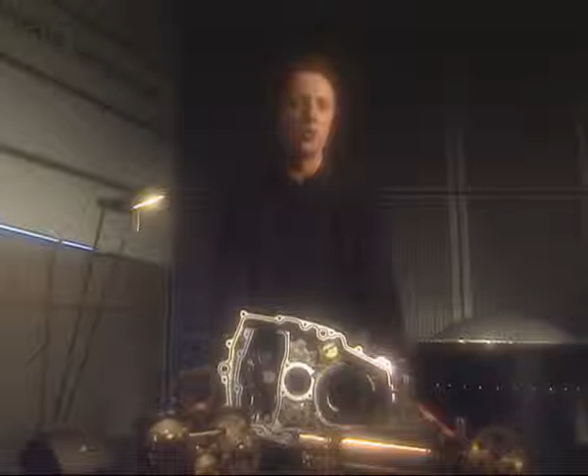Thus, the generator is able to provide a fixed frequency for the aircraft electrical network. Like blood in our body, oil is the key component of the IDG. It is used for cooling and lubrication, but it is also a hydraulic fluid used by the CSD to mechanically regulate the rotation speed of the generator. So you can see just how mechanically complex the IDG is.

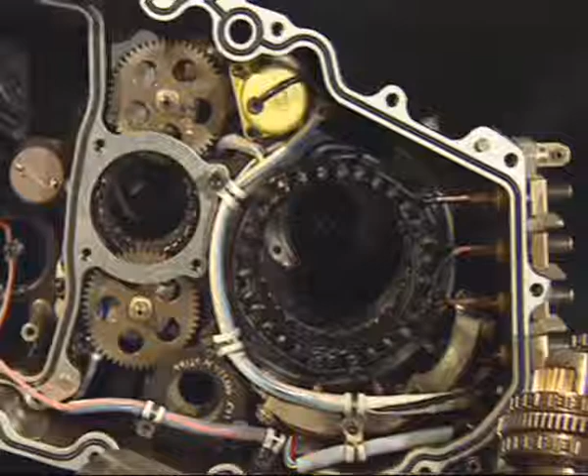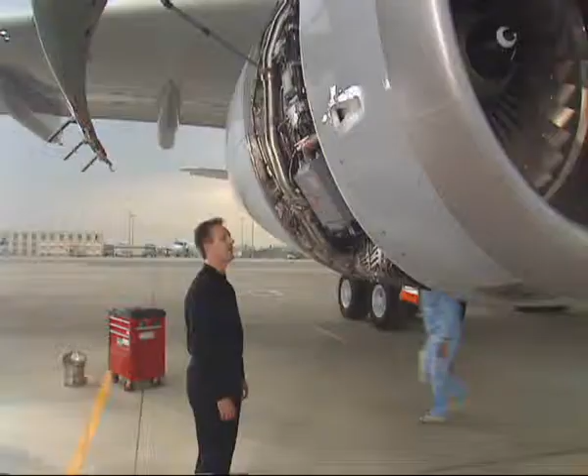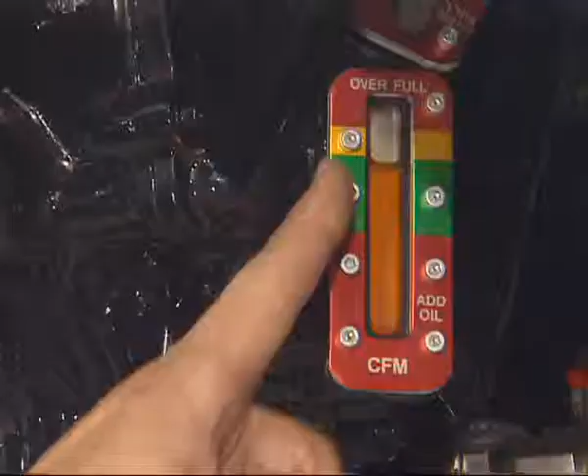The IDG is driven by the engine accessory gearbox. It is accessible in the engine nacelle. The reliability and the efficiency of the IDG depend on the cleanness and the correct quantity of oil used. The oil level is controlled via the sight glass. The cleanness of the oil is ensured by taking some precautions, which are described in the AMM procedure.

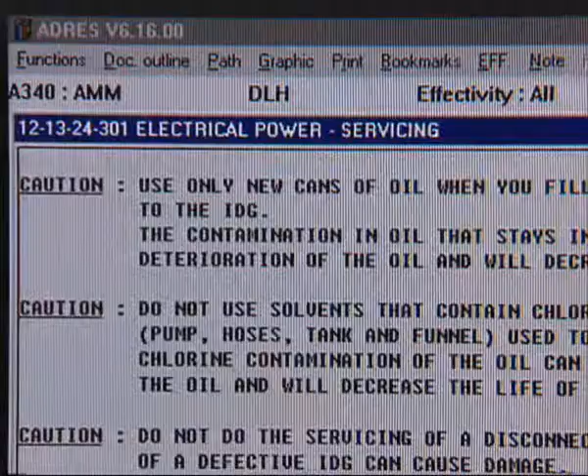The contamination of oil with water or dust can cause premature filter clogging, excessive wear of the IDG, and overheating conditions. Oil cans and tools should be kept in a clean and dry environment. It is preferable to use a new can of oil when you service the IDG.

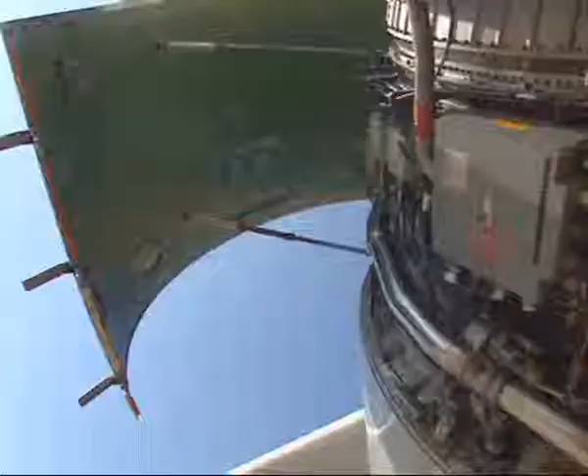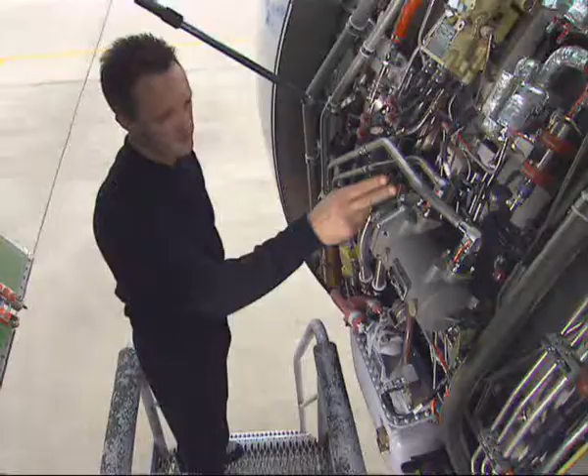The IDG oil system consists of the IDG itself, an external cooling circuit, and the IDG oil cooler. Let's take a look at how the oil circulates in the IDG oil system.

You recognize the IDG system: the IDG, the external cooling circuit, and the IDG oil cooler. During operation, the oil is pumped out of the IDG to be cooled down in the cooler. Then the cooled oil comes back into the IDG.

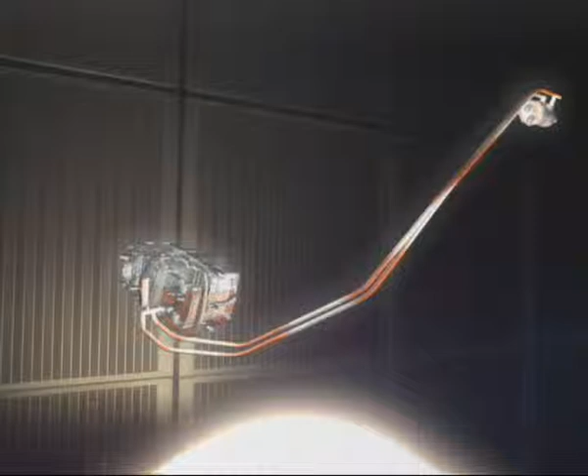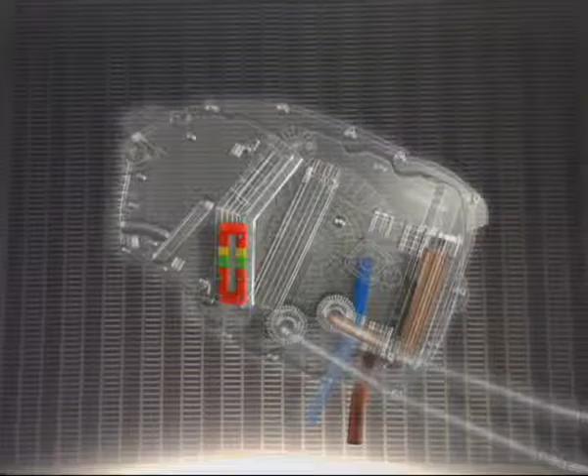During servicing, the oil is pumped through the IDG pressure fill port. It goes through the IDG filter and exits the IDG into the external circuit, flows through the external circuit, circulates into the cooler, flows through the external circuit, and comes back into the IDG case.

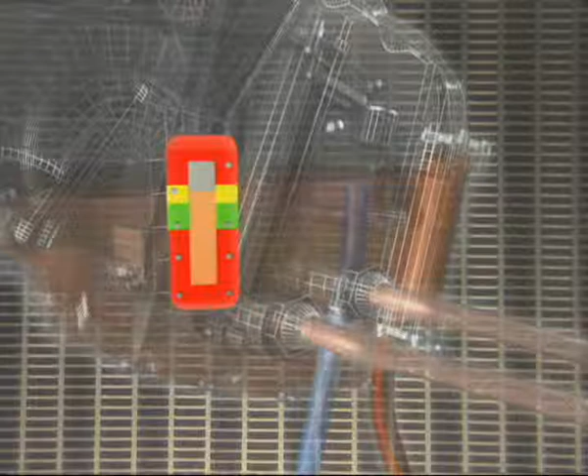Now the IDG case is being filled with oil. Once the oil level exceeds the top of the overflow standpipe, it flows outside the IDG through the overflow drain port. The top of the overflow standpipe corresponds to the top of the green band of the sight glass.

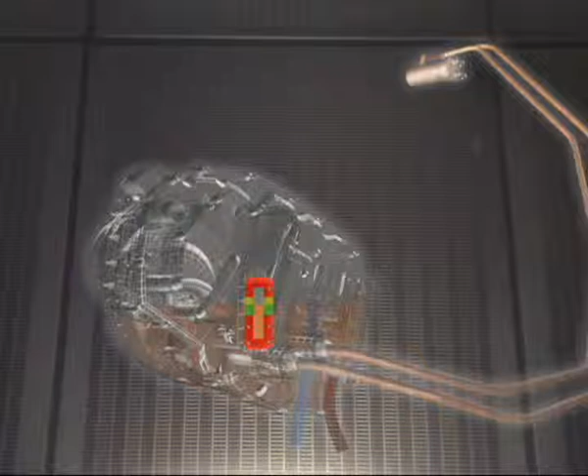The servicing procedure is aimed at filling all the cavities of the circuit with oil, expelling air pockets, and thus setting the optimum oil level.

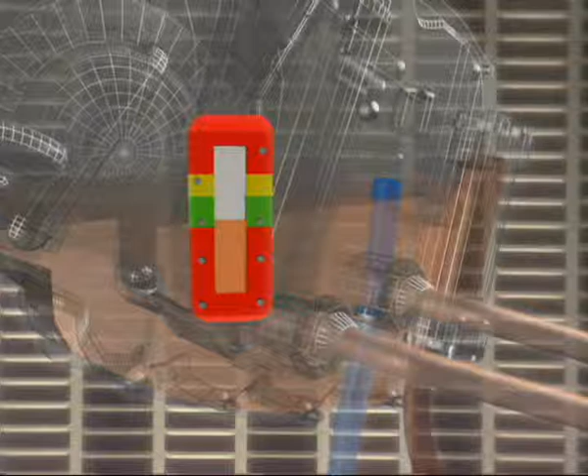If there is too much oil in the IDG, the operating temperature increases, and there is a risk of IDG disconnection in flight. A low quantity of oil may be at the origin of a low oil pressure and electrical frequency fluctuations. The generator may be lost in flight. After correct servicing, the optimum oil level is at or near the top of the green band.

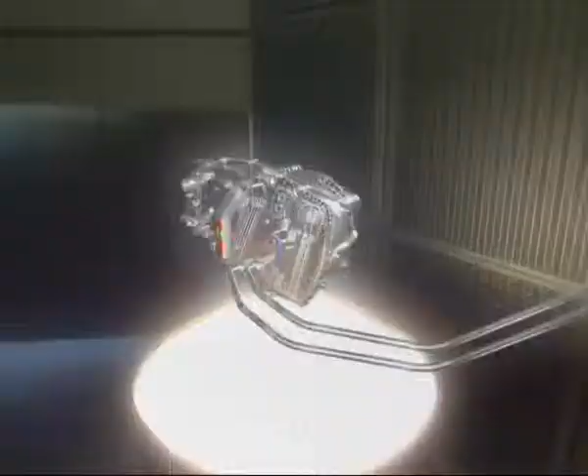On the A330 and A340, there is an oil level sensor. If the oil level is in the lower part of the green band, low oil level detection may be generated in operation, leading to additional burdens for the maintenance and flight crews.

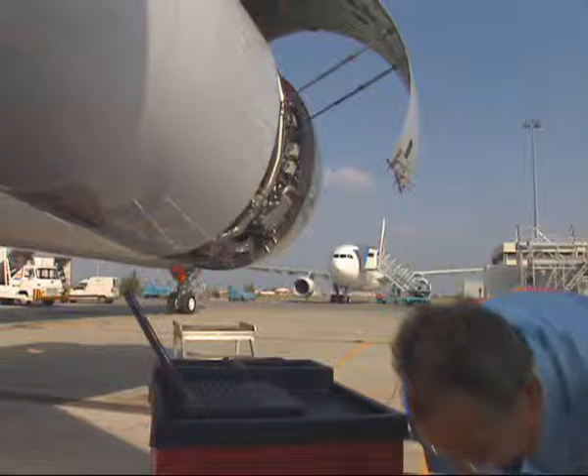Now let's go back to the aircraft to service a genuine IDG. Read caution notes and follow the AMM procedure step by step to ensure that the entire IDG oil system will be properly filled with oil and all air pockets are expelled.

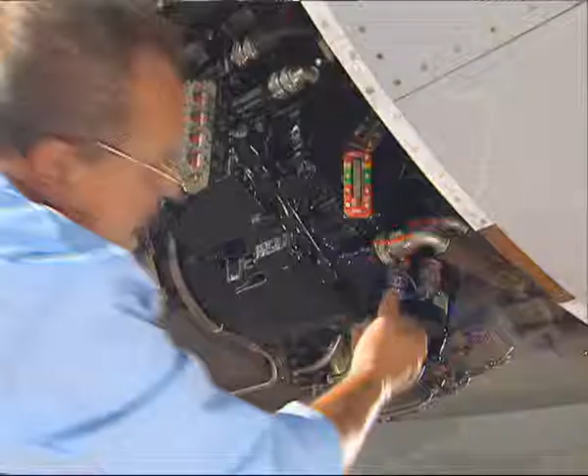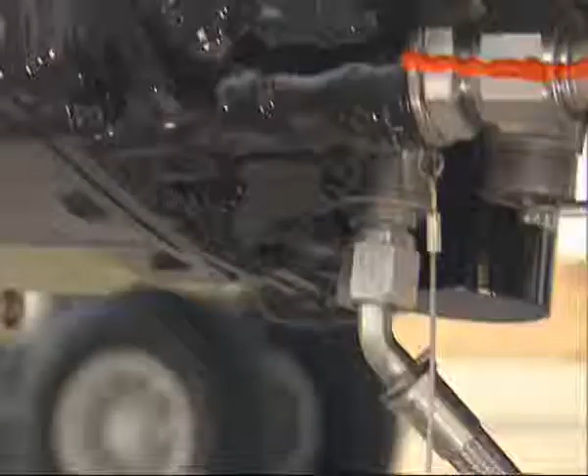Put a container under the IDG to collect the oil that will overflow during the servicing. Remove the dust cap from the overflow drain port. Connect the overflow drain hose on the overflow drain port. This action will depressurize the IDG. Some oil may come out of the overflow drain hose. Ensure that the tube is not bent and the end is not immersed in the oil.

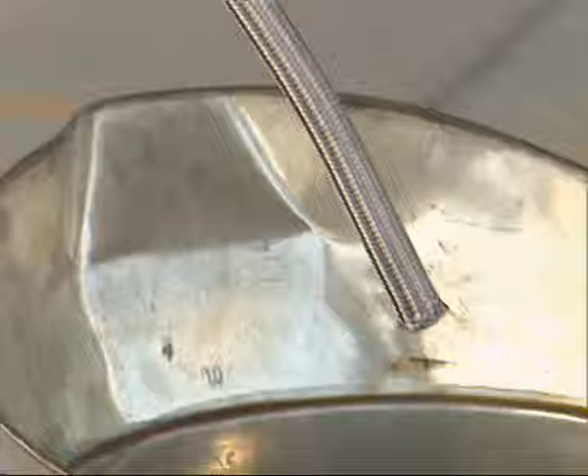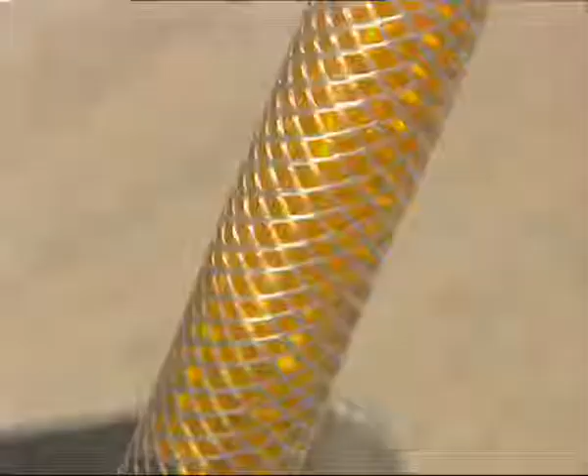Remove the dust cap from the pressure fill port. Connect the pump onto the pressure fill port. Fill the IDG with oil at a maximum of 35 psi. Ensure that there is enough oil in the pump reservoir in order to avoid the introduction of air in the IDG oil system. Use a transparent tube to control the condition of the oil during the IDG filling.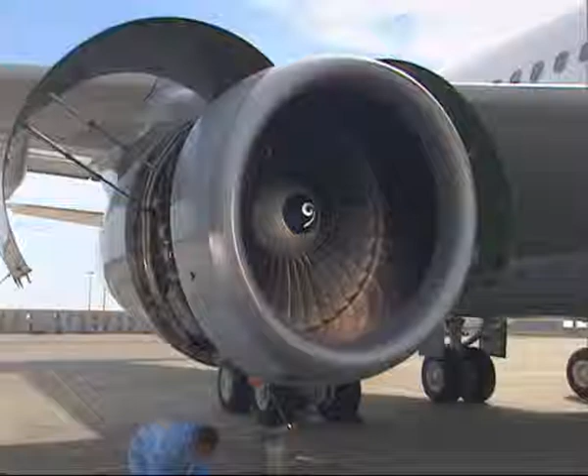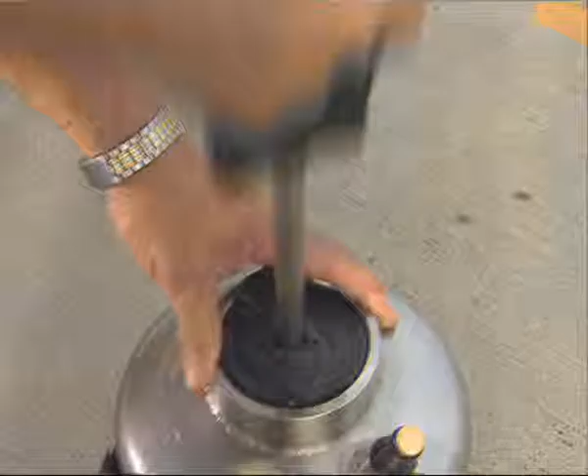During servicing, the oil enters the pressure fill port and crosses the filter, flows through the external circuit and circulates into the cooler, flows through the external circuit and comes back into the IDG case. Keep pumping.

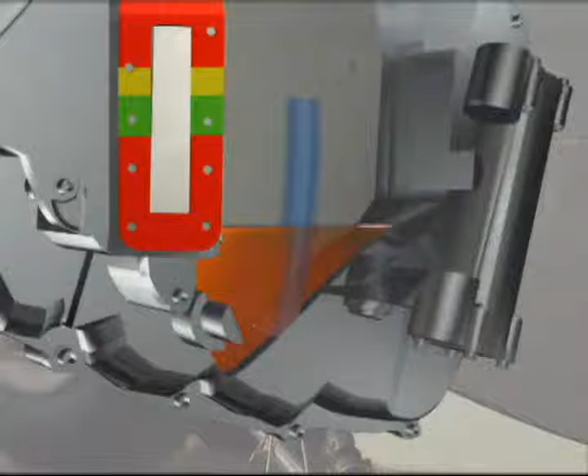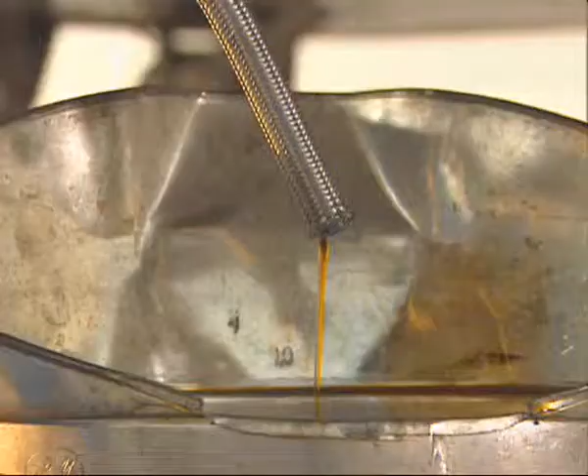The IDG case is then filled with oil. Once the oil level exceeds the top of the overflow standpipe, it flows outside the IDG through the overflow drain port. Keep pumping to fill the entire oil circuit and expel air pockets from the system. Stop pumping when the quantity of oil collected at the overflow drain hose exceeds 1 liter or 1 quarter of a US gallon. The oil will continue overflowing until the level has dropped down to the top of the overflow standpipe.

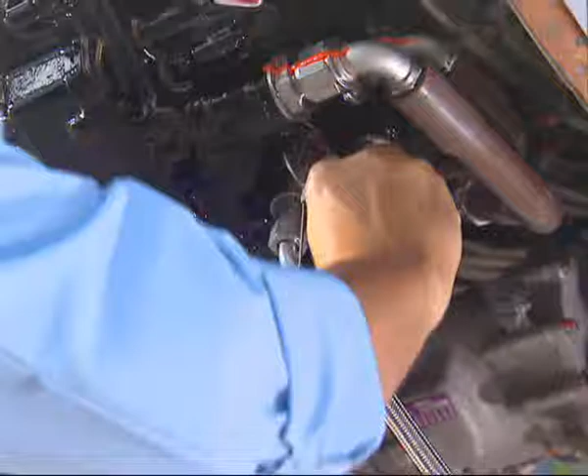While the oil is overflowing, remove the pressure fill hose. Install the dust cap on the pressure fill port. Once the oil level has reached the top of the overflow standpipe, the oil stabilizes at its optimum level at the top of the green band.

When only drops of oil come out of the overflow drain hose, remove it. Install the dust cap on the overflow drain port.

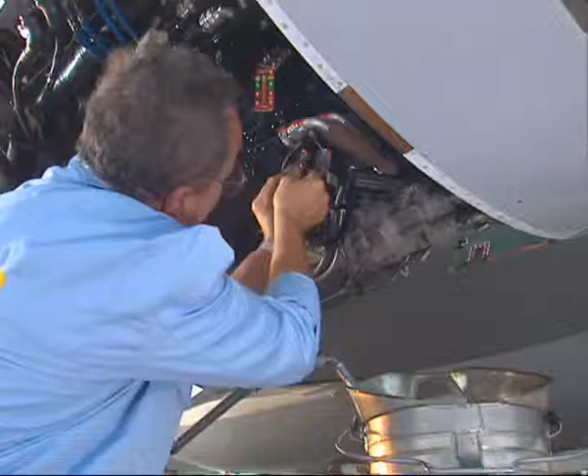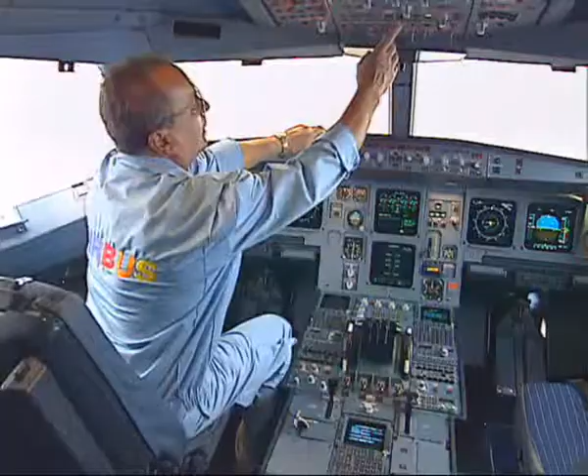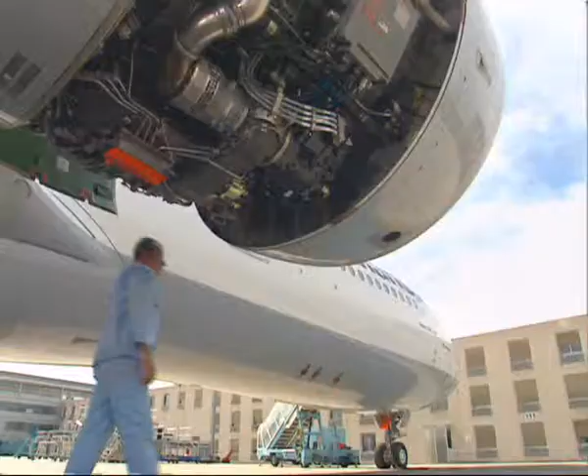Do an engine dry motoring or start the engine at idle for at least 2 minutes to allow the oil to circulate through the system and ensure that every cavity of the oil system is properly filled with oil.

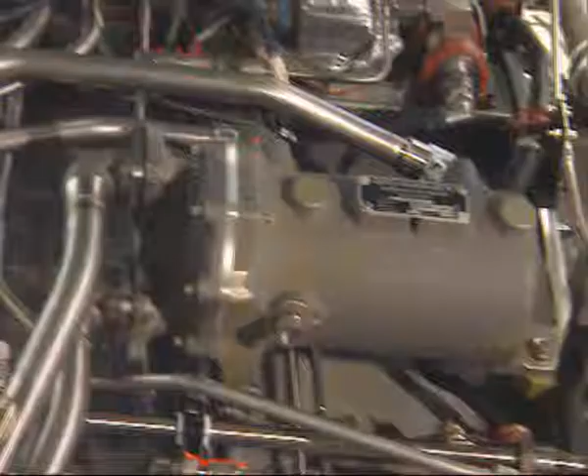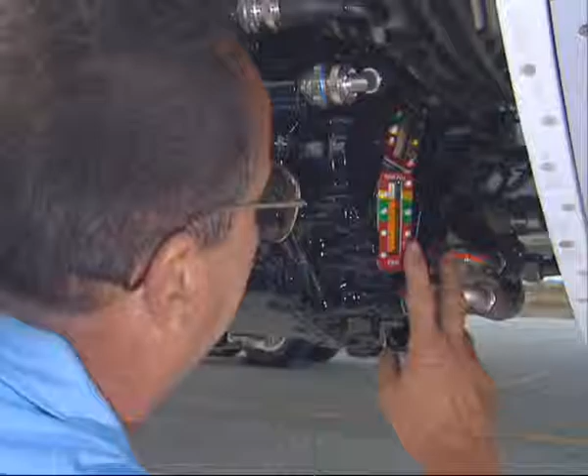Let the oil level settle down for 5 minutes. The oil may be slightly above the top of the green band due to thermal oil expansion. However, the oil level may have dropped due to the presence of air in the system before the motoring. Look at the oil level sight glass again to ensure that the oil level is optimum.

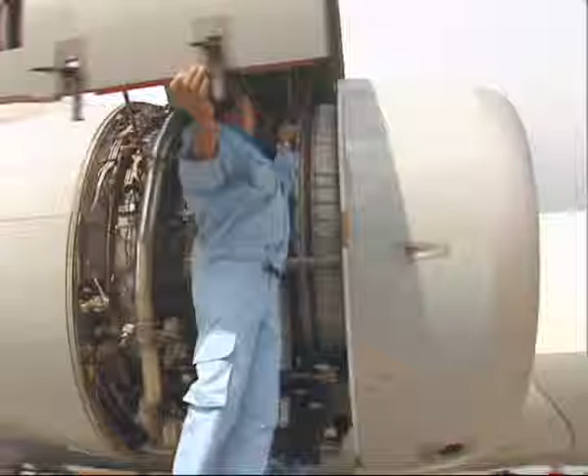Good servicing is a key factor in ensuring a smooth and long IDG operating life. It contributes to the operational reliability of the aircraft.